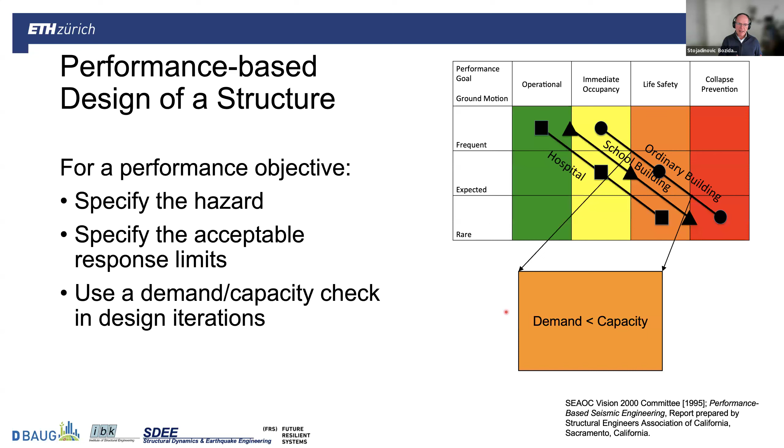The way we do it is that we consider a number of performance objectives associated with risk, with the hazard exposure that the building may have, differentiating of course between buildings. But then for the design situation, we select the design hazard, we select the acceptable response limits that define the performance, and then we use a normal standard design iteration that starts with a trial design, evaluates that design in terms of the attained performance, and then we judge if we're satisfied or not.

If not, we go back and improve the performance of the trial design, and then try again until we actually get a good design that satisfies these desired performance objective or objectives.

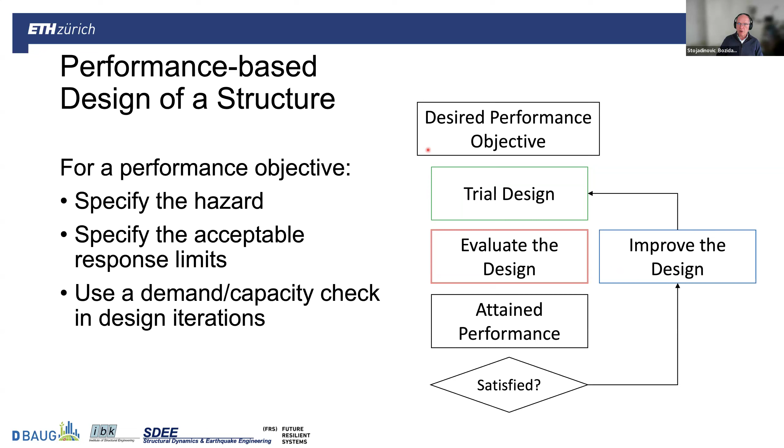This works, and we see that by comparing recent and not-too-distant past earthquakes—here is an example from Mexico City that suffered two similar earthquakes in magnitude and location, in 1985 and 2017—there is a very remarkable difference in the performance of the city and the individual buildings, especially in terms of casualty counts. We see improvements not only immediately because of the newly adopted code, but also as we go forward in time and get better and better buildings.

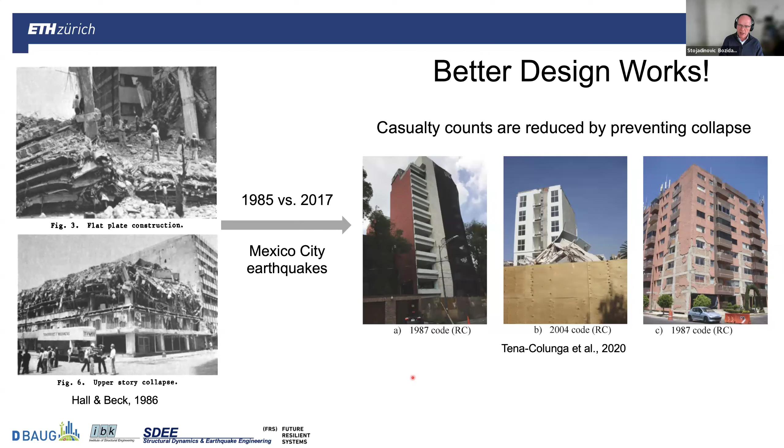This is a good sign that we can address this collapse prevention performance objective.

But as we went forward in research, and especially in practice, we see there is a variety of performance objectives we can look at. Casualty risk is one. Chances of the building being unoccupiable, expected downtime, building cost, the initial one, and the repair cost—you see how they are inverse from each other. We have recently even started looking at the carbon impact of the initial building cost and repairs within the same performance-based framework, meaning the scope of possible performance objectives has increased.

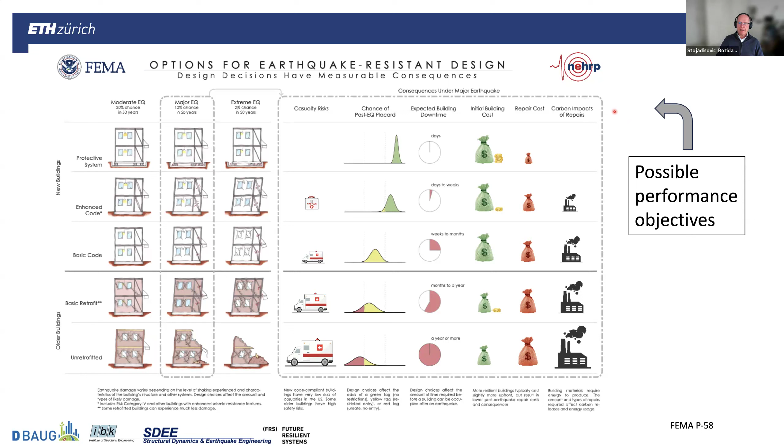Clearly, the scope of possible structural solutions has widened in many ways. This is a statement of the power of the performance-based earthquake engineering framework, this particular one conceptualized at the Pacific Earthquake Engineering Research Center.

But at the time, the MAE and the MCEER Center were also very active, working along the same line: starting with the exposure of the building, looking at information about the facility, then looking at the hazard that structure is exposed to in terms of a probabilistic description, with a variety of different intensities associated with different probabilities of exceedance, and then jumping into a risk evaluation that starts with structural analysis in terms of engineering demand parameters, looks at capacities and resulting damage, and then evaluates losses—either direct ones in terms of the lost building or casualties, and possible repair cost, as well as indirect losses in terms of downtime and inability to use and offer service in that facility.

Overall, the performance-based engineering framework started to consider multiple performance objectives and facilitate decision-making in a probabilistic sense. This is a very important step forward. It took a while—25, 30 years to get here—but it is being adopted in practice.

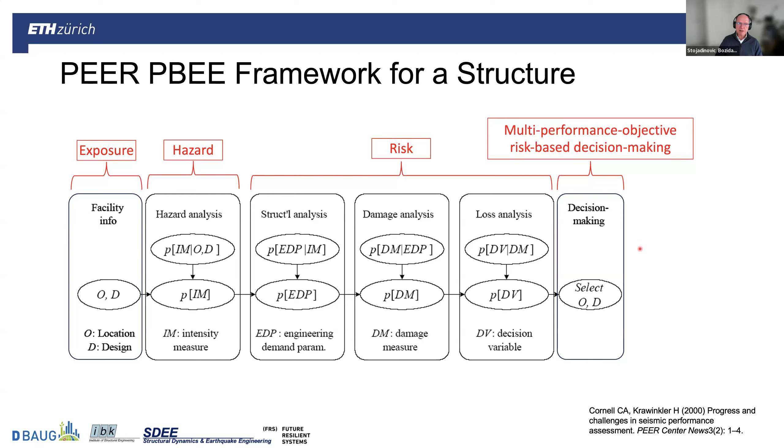And what we have seen in recent earthquakes is this progress toward preventing collapse, but still some buildings fail. To recover after an earthquake, we need to rebuild these kinds of buildings—most likely we need to start from a completely new structure.

However, when we have something less severe in terms of building performance, then we can indulge and undertake repairs. Especially when we consider the carbon loads imposed by rebuilding, a repair may be a very attractive option, not only financially, but perhaps also from many other performance views.

We repair structural elements and systems, of course, but also the non-structural elements that suffer damage. Then, once the building is repaired, we start to restore its function—repairing the equipment, the infrastructure, the service connections—and go on to restoring the functions of that building: turning the lights on, the water on, communications on, air conditioning and heating on, bringing the building back to life and attracting people back to it.

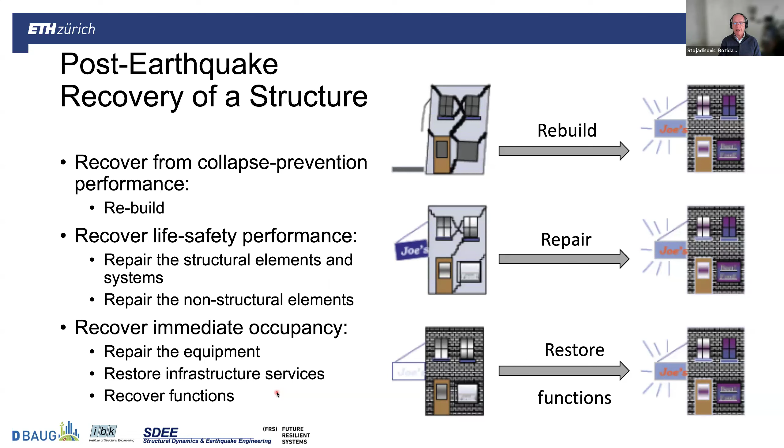However, we have seen in past earthquakes, especially when there is much more repair than tragic loss, that the path to recovery is quite long, depending on the damage state—the longer the bigger the damage state is—because there are quite a few preparatory tasks one has to complete before any repairs can start.

We always start with some rapid inspection in terms of tagging and occupancy immediately after an earthquake, but then we have a detailed inspection, and perhaps some cleanup.

We need to consider what repairs can be done, what needs to be done, and design that, estimate the cost, find the contractors, find the financiers, obtain the permits, mobilize the contractors with their materials and equipment and people who are going to work, and only then start the actual repairs. So there is quite a chain of impeding factors that Mary Comerio identified in the mid-80s.

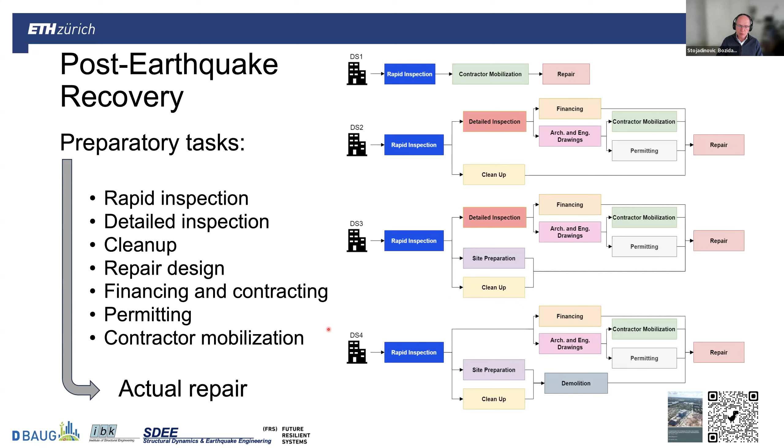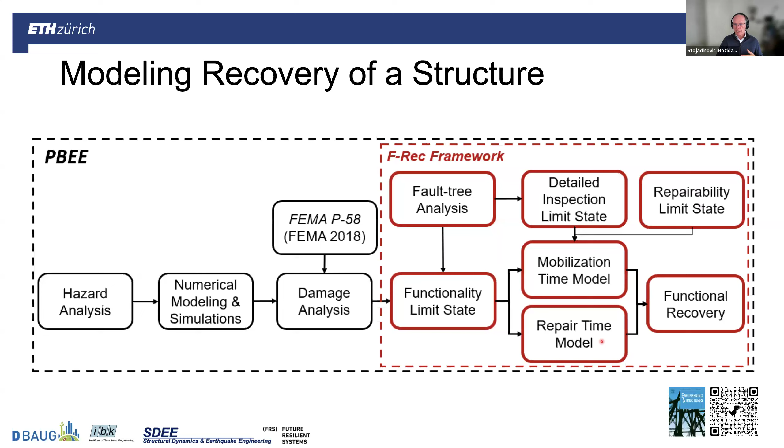This chain is here now, very visible, and we can dissect it into particular elements and see how to work with it. This is a step that is very necessary when we want to model the recovery of structures. We can build on the performance-based engineering framework, perhaps the FEMA P58 incarnation thereof, and add another analysis of the functionality of the building, perhaps using fault trees, to look at the mobilization time needed to overcome the impeding factors, and the repair time needed to restore the building to the level when the lights can be turned on.

And the function of the building restored to its previous, pre-earthquake state. This framework, the one I choose to present here, is the F-Rec framework that Dr. Vesna Terzic developed originally, and then we collaborated on it - I'll talk about this later. This is a framework that models and simulates the repair and function restoration processes of a building, and it is a very detailed one.

It allows one to put together a repair plan in terms of the sequence of repairs of structural and non-structural components. In this example of a 42-story building in Los Angeles, there is a set of Gantt charts addressing particular elements such as shear walls and structural elements, non-structural elements such as elevators, and service level elements such as partition walls, cooling and conditioning, as the progress of this work goes on floor by floor in this tall building.

We can also see what limited resources in terms of material, machinery, and manpower for recovery can do to prolong the recovery timeline. The recovery timeline is already almost a year, and with limited resources or additional impeding factors during the repair process, it may get even longer.

But what is very important for design purposes is that we can quantify and measure this repair process using the well-known resilience curve, the swoosh-shaped curve that starts with a drop of functionality and a time to decide what to do with the building, time for impeding factors, and then the process of recovery that gradually starts and builds up towards restoring the function of this particular structure.

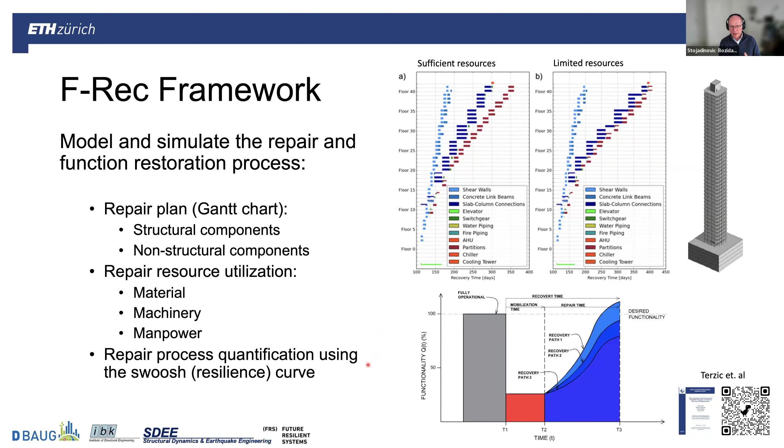Having this framework and the ability to analyze recovery in good detail, we can quantify it using the resilience curve. This gives us an opportunity to extend the performance-based engineering framework by inserting the recovery process simulation between the risk and the loss assessment.

So now the loss assessment includes this time dimension. It includes a very good estimate of the time needed to recover, the cost needed to recover, and the resources needed to do so, either to absorb the impeding factors and take care of them, or to affect the actual repairs. So the scope of decision making is now much broader, and yes, more complicated, but also more realistic.

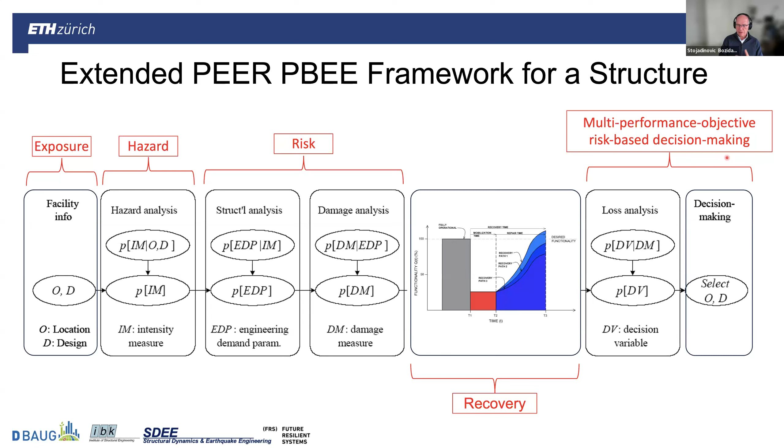This is especially true looking at modern earthquakes happening in modern communities and cities that have advanced in terms of protection against collapse and are now not suffering as much in that sense, but still suffer quite a lot in direct and indirect losses to the buildings in them.

And speaking of cities, let's go to that level now. A city is a complex system, a system of systems, of houses and infrastructures, the technical systems, but also a city is about people - first and foremost, the city is about people and the interaction that these people have with the technical systems that serve them in the city.

This is a socio-technical system of systems. And as such, when we want to look at resilience-based design, we have to look at the elements of the system. The main reason is that the recovery of a single structure, no matter how masterful we are at performance-based design of that structure, does not happen in a vacuum. Here is an example from Christchurch, where the central business district was quite damaged in the 2011-12 series of earthquakes.

But it was cordoned off for a while until the impeding factors and the planning was completed, until the financing was done. And then slowly the cordons were lifted as the buildings became available for repairs and finally repaired or replaced and returned back to function, so that life in this downtown could come back to approach the normal pre-earthquake life. So recovery of the housing and infrastructure induces multiple interdependencies that we have to consider when we move from consideration of a single structure to the consideration of a city.

Here is an example. We can have casualties and injuries right after an earthquake, and they will present a load on the emergency services somewhere in the city. Further, housing damage widespread in the city represents demands on temporary housing and repair resources - temporary housing immediately, repair resources slightly after the impeding factors are overcome.

But on the other hand, lack of housing, or people moving out, reduces the demand for infrastructure systems. So those systems have some time to recover and repair and restart their services, because the demand for their services is not that high. In the meantime, as the recovery gains pace, there may be competition for recovery resources, introducing a further level of interdependency.

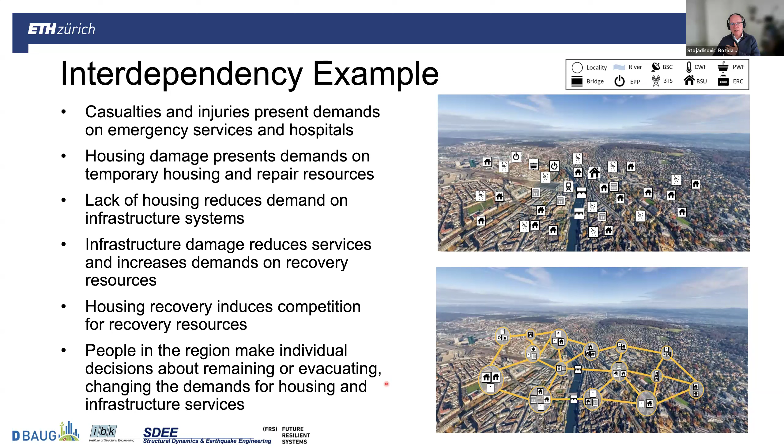And finally, and most importantly, the people in this stricken region, the city, make decisions about what they're going to do. Are they going to evacuate or remain? And those decisions clearly affect what the housing is doing, and how that housing affects the other systems that are in the city. So looking at the recovery of the city cannot work without considering these interdependencies.

Recovery is a regional problem. The single structure depends on other structures. So the hazard and risk exposure, hazard assessment and risk exposure, become regional. The infrastructure systems get immediately involved. The recovery of the technical systems plays a role in the recovery of the city very, very clearly.

And there are very, very important interactions between the individual actions and the collective actions of the citizens, and not only in how they solve their own individual problems, but how they restore the workings of the city at several societal levels that are higher up above the personal safety and well-being of a person.

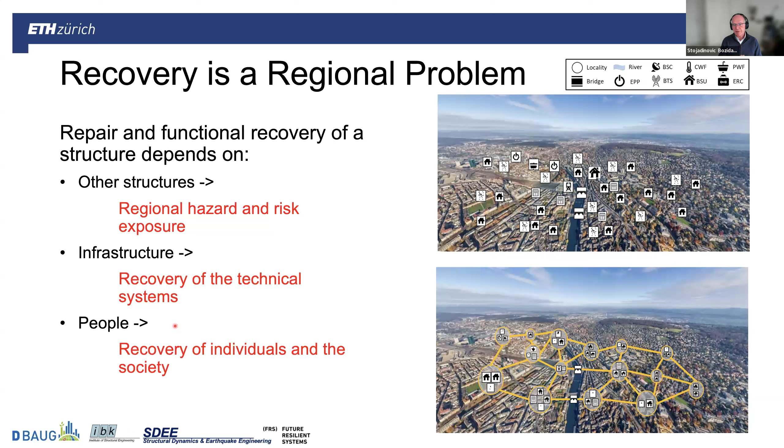So to formulate resilience-based design of a city, we have to include a notion of technology-neutral design, building on performance-based design principles, and also address several performance objectives simultaneously - but those are now related to the risk and recovery of the city, not of a single building.

Considering that city as a socio-technical system of systems with all of the interdependencies involved, therefore the resilience-based design problem is more complex.

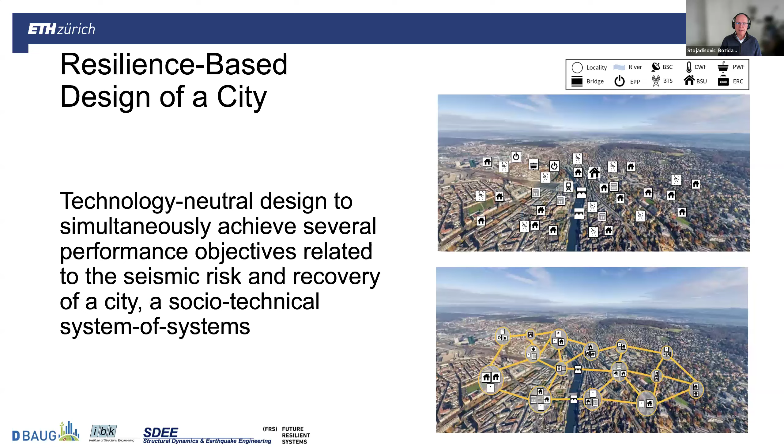To solve this complexity, we need a really good model. And what we have been developing in ETH for a while now are models that look at the city as a system of systems, and employ flow models to represent the flow of resources within one infrastructure system and between infrastructure systems.

The components in these systems, including housing, can be damaged, and as they are, they disrupt the function of these systems. But they are repaired in some repair sequence, and they restore their functions gradually through the recovery process. This induces an evolution of the infrastructure system level demand and supply and the ability of that system to function and satisfy the needs that may exist in the city, in the system of systems, at any point in time during the recovery process.

By this supply and demand interchange for every one of these elements, and because we have a system operation model, we can look at how the interaction between the different systems affects each other, and how the interdependencies occur during the recovery process, and what are the consequences of those interdependencies.

It is important that interdependencies are captured. The model I talk about is this iRe-CoDeS framework.

This is the model we have at ETH that simulates the infrastructure system of systems recovery process. It enables us to look at the operation, supply, and demand time history, capturing interdependencies on the operation side, but also the recovery resources, the material, machinery, and manpower involved in the recovery process. Also the manpower, finance, and decision-making effort, permitting effort required to overcome the impeding factors to the start of the actual repairs.

This dual operation and recovery view of the supply and demand is another important step in the iRe-CoDeS framework. It enables us to look at and quantify the recovery process using these swoosh-shaped resilience curves, starting with the drop of service and recovery of it, and due to the presence of interdependencies, identify regions where the connections between the water, power, and communication system induce additional drop in functionality and inability to satisfy the demand. There is a larger unmet demand.

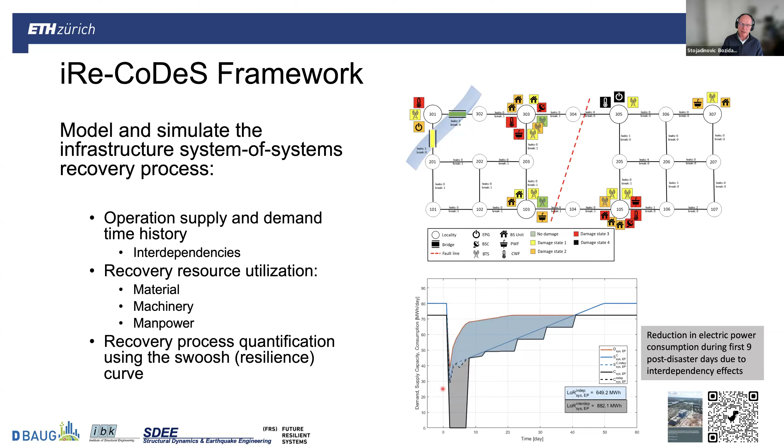So what we did next, and that's where we started to collaborate with Dr. Vesna Terzic, the ETH side with iRe-CoDeS, her side with F-Rec, is to see how this whole thing can come together in a performance-based analysis of a city. There we recognize we have multiple buildings and multiple infrastructure systems. The buildings are represented in F-Rec as individual analyses, hence this exponent n, and the infrastructure system is already represented in iRe-CoDeS. So the system analysis framework starts with the hazard analysis, just like the PBE framework, the structural analysis to figure out the damage, but now that's done for multiple buildings at the same time.

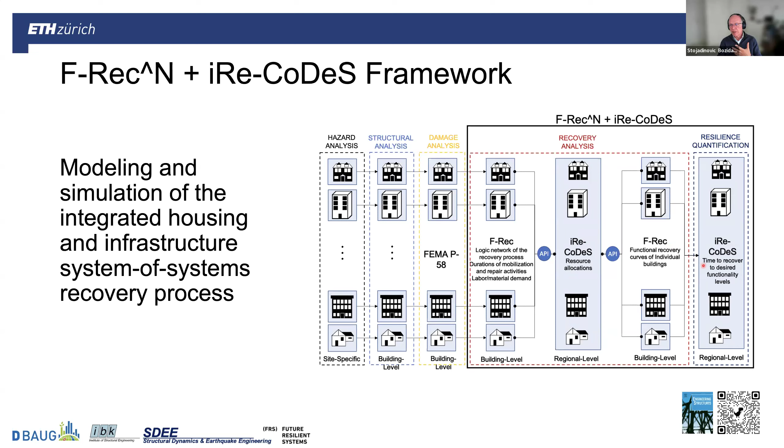Then multiple buildings are assessed for their recovery trajectories using F-Rec. This is then integrated in iRe-CoDeS, both in terms of the recovery resources and the functional recovery of the infrastructure systems. So both the buildings and the systems are treated in parallel at every time step of the iRe-CoDeS recovery analysis, and that, in the end, produces a city-level estimate of what it will take for it to recover.

Here is an example from the downtown San Francisco fictitious earthquake affecting several thousand buildings in a number of blocks that form the downtown San Francisco business district and a little bit towards the marina. Using some typical buildings, tall ones, medium-rise ones, and short ones, we simulated the recovery, and one can see how stepwise recovery, story by story, takes place in terms of building function, with short buildings recovering faster than the very tall ones.

But there are other things we can see, because we consider recovery resources also as the demand for workers. The supply for workers is this line here, where the demand is this jagged line indicating the variability of the demand for workers once buildings get ready for the actual repair, once they overcome the impeding factors. These blue areas are areas where the current supply of workers is insufficient to meet the demand, causing further delays in the recovery process, for example this jump here.

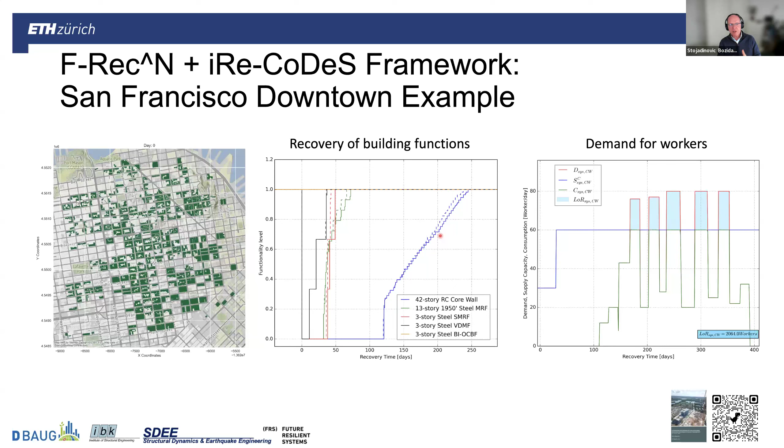This is a very valuable analysis, showing that the combination of F-Rec and iRe-CoDeS can be a very nice regional recovery analysis tool, helping make decisions in real time, and helping make projections for what future earthquakes may do.

One additional, very important aspect is the view of what people do and how people reconstitute their lives and how they reconstitute the societal functions of a city. Individual citizens make choices, whether they will reoccupy the house where they used to live or not, where they will live, when they will restart using the infrastructure systems, how this demand will be reflected on the systems, and how they will come back to life in this city.

If they're nurses, they can come back to work in hospitals. If they're teachers, they can come back to work in schools. If they are hairdressers, they can come back and service their customers. If they are workers in factories, government, or financial services, they can restart everything that constitutes the economic activity of a city. The model we use to do this is based on the capabilities approach by Sen and Nussbaum. This approach looks at commodities.

That is, what are the resources that enable a person to fulfill their capabilities. And the capabilities are what that person may want to do. The conversion factors are simply the existence of a house, operation of an infrastructure system at a very basic level, and then further operation of the hospital, school, businesses, and so on.

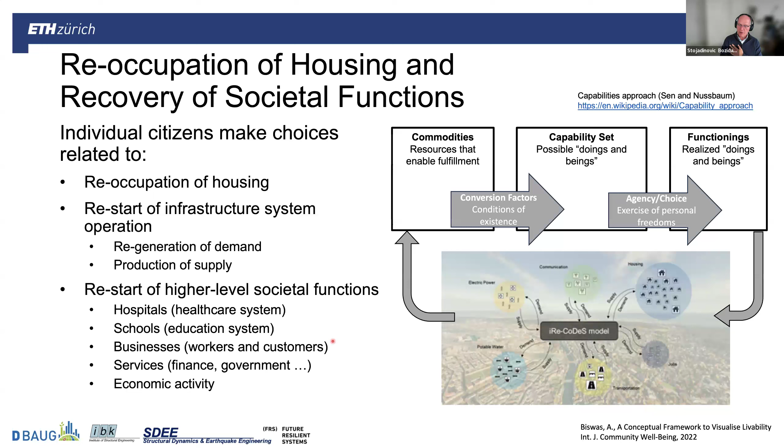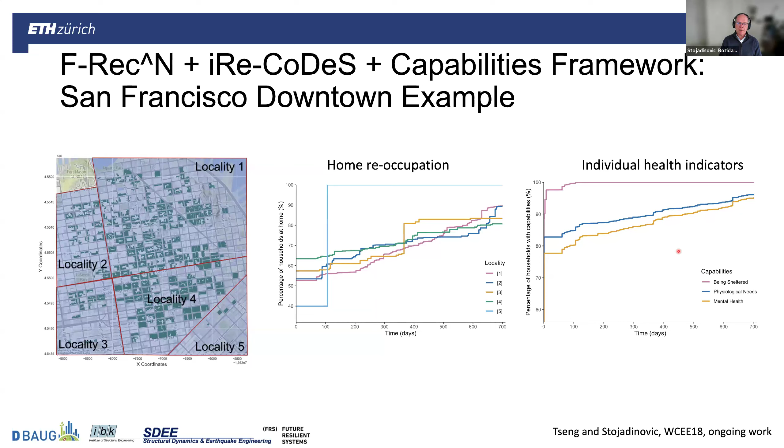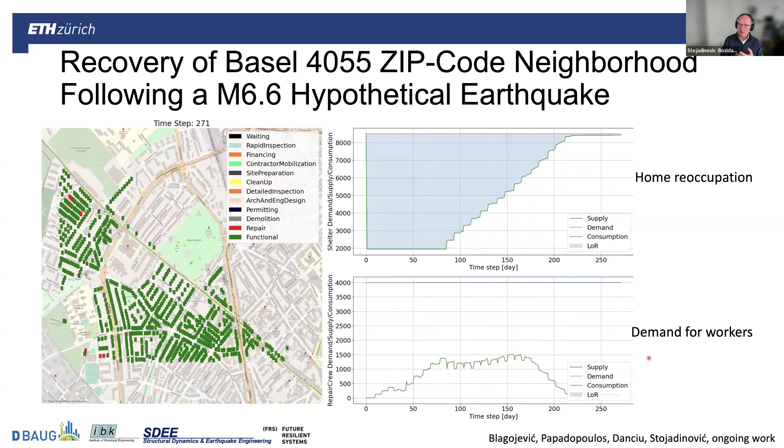But in a particular setting of the city, it is quite important to estimate what that demand may be, so as to contract people from outside areas that may not be affected by an earthquake but are able to work on the recovery of the buildings here.

This simulation and the other ones that I presented are made possible by software, of course. The software we're using is now Pythonized ReCoDeS, PyReCoDeS. It is open source, and here is a QR code for the link to that open source repository. It is designed to model the recovery of a city and to quantify its resilience.

The structure is object-oriented, of course, and we think it has a fairly clear structure where users can adopt, input their own vulnerabilities and recovery functions, look at their own models of infrastructure systems or adopt some open source models that we use, and compute the time evolution of certain parameters that are important for the performance aspects they would like to investigate, both on the operational side and on the recovery resource side of a city.

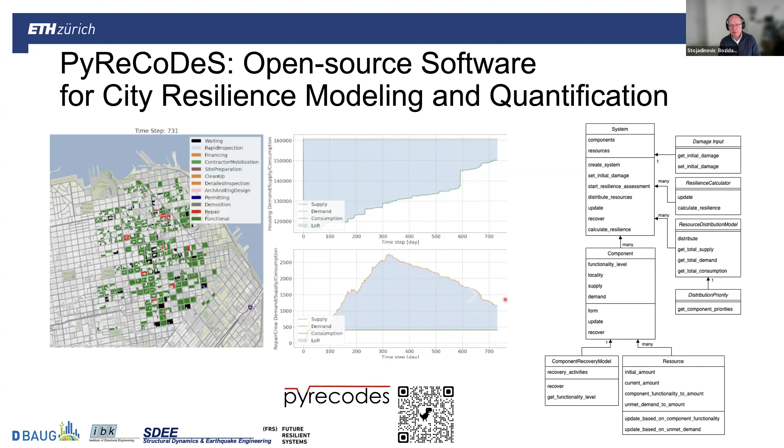With this software, we hope that this or some similar existing software can facilitate adoption of resilience-based design. But one other aspect of resilience-based design I need to address is the resilience metrics. Here is the one we have been using, which compares the system supply, the system demand, and computes the actual realized consumption of a particular resource, say electric power.

This blue area here is the actual unmet demand, and integrated over time, we get a measure of the lack of resilience, a measure similar to what many authors have proposed in terms of the area under, or above, the swoosh resilience curve.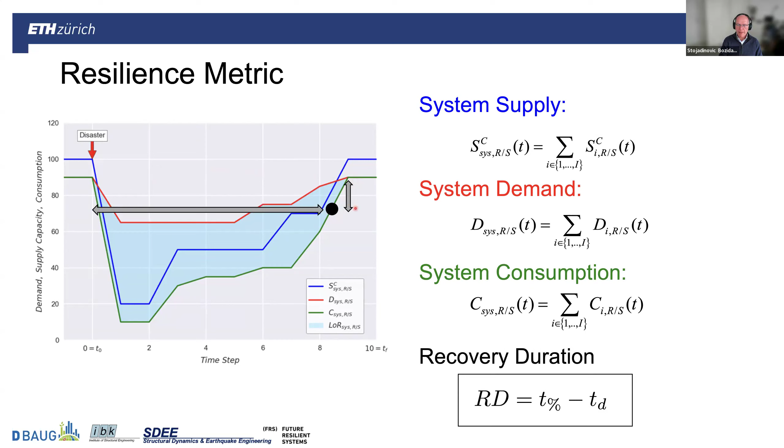But we also look at another simpler measure: time to recovery of a certain service level. This is the duration it takes to come back to a percentage of the previously available consumption. It's a simpler measure, also supported by the NIST 1190 document.

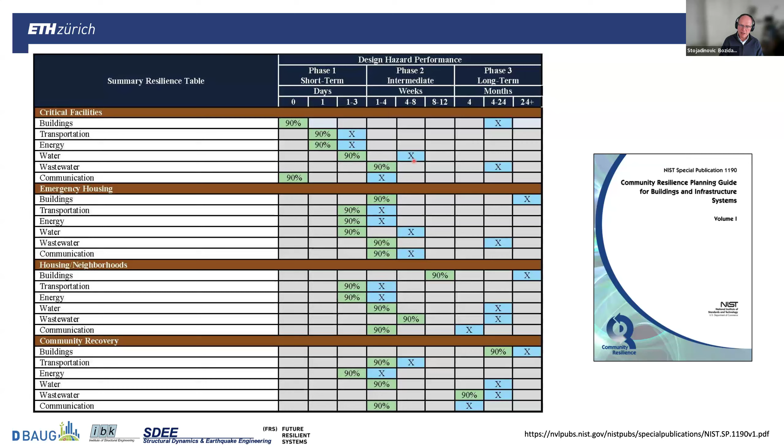Times to recovery in terms of short, intermediate, and long for many systems and facilities of a city have been proposed, with percentages indicating where this is desired, the green boxes, versus where it's estimated to be now, the blue ones, showing we have work to do to improve resilience. But this format of time to recover is quite useful.

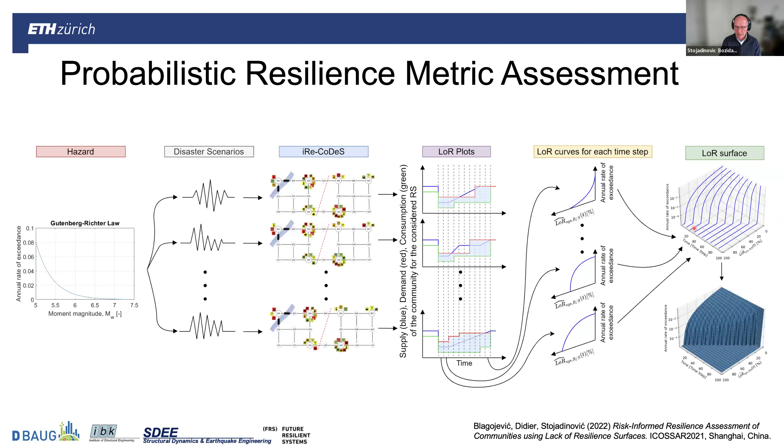We can go further with iRe-CoDeS and do a probabilistic analysis of this resilience metric and others, starting with the probabilistic hazard assessment, a number of iRe-CoDeS runs for different disaster scenarios, aggregation of those runs, and production of lack of resilience surfaces, or time to recovery surfaces.

If we set a goal of having, say, less than 20% of unmet housing demand 10 days after an earthquake, we can look at the state of the community's housing at the 10th day, and ask ourselves: is this annual rate of exceedance acceptable or not for this particular community?

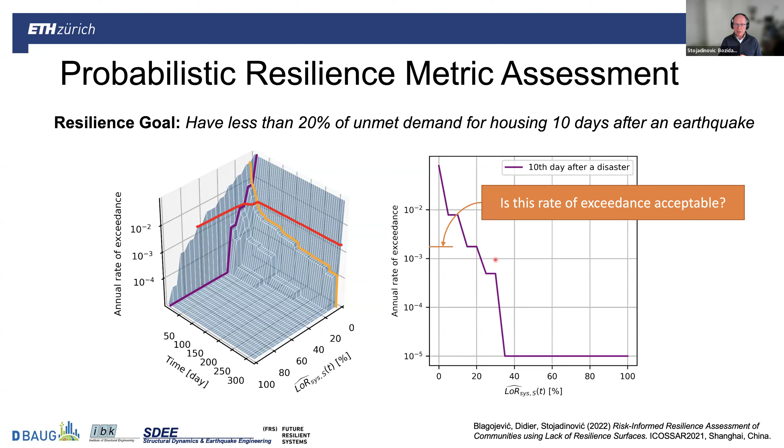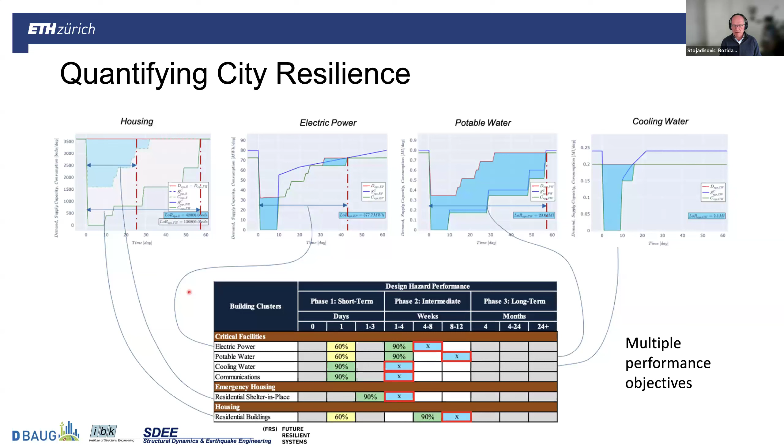That way we can start formulating probabilistic performance goals related to resilience of a city, of a system of systems, considering housing, electrical power, water, cooling water, different aspects and services, similar to what the NIST 1190 document prescribes. So multiple performance objectives formulated considering the risks and resilience of a city.

The framework that could be termed the resilience-based design framework starts with the performance-based framework, but does so multiple times to cover the housing instances and infrastructure system components in the city, then brings them all together in the recovery module.

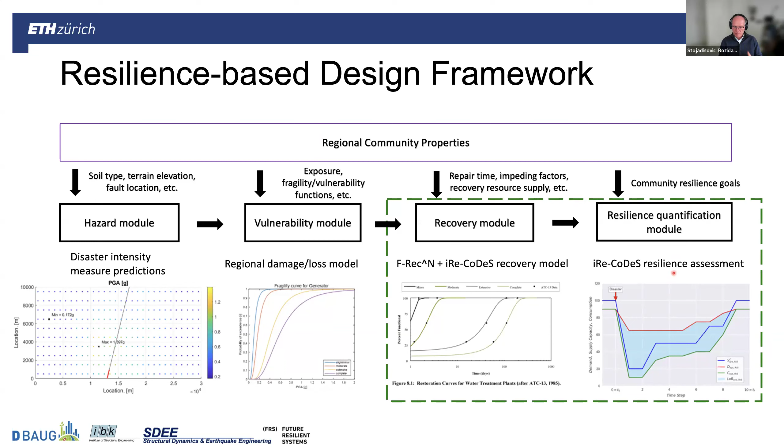Resilience is quantified and computed in various ways, but most likely in terms of this time to resumption of service. So we can think about the resilience-based framework of a city in a way that's similar to the performance-based framework for a structure.

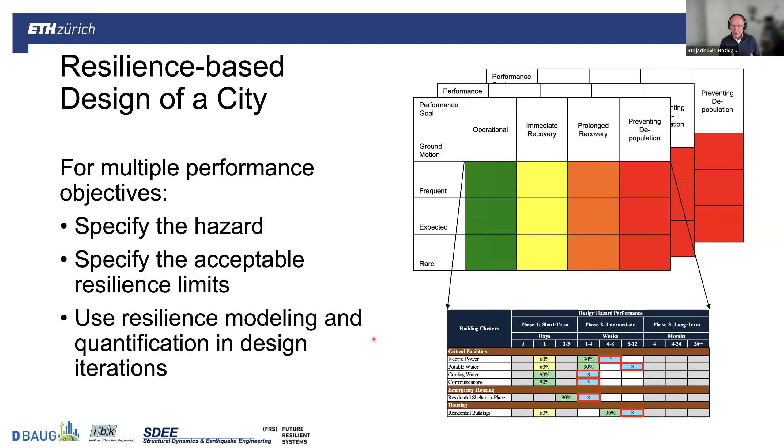One of these panels with performance objectives, hazard, and functionality level needs to be repeated many times and integrated using a framework such as iRe-CoDeS, to produce performance measures or resilience measures that we can look at in the NIST 1190 framework, for example, and evaluate if such a city is resilient enough.

We would start with the design resilience objectives, look at the current state or some future state of a city, thinking about urban development in the future. Use a model to evaluate this design for resilience performance, and check if we're satisfied. We can also deploy measures to improve the performance of the city and test them.

I won't talk about them now, but they're definitely possible to imagine: making buildings less vulnerable through retrofits, or providing more resources to increase the rapidity of the recovery process.

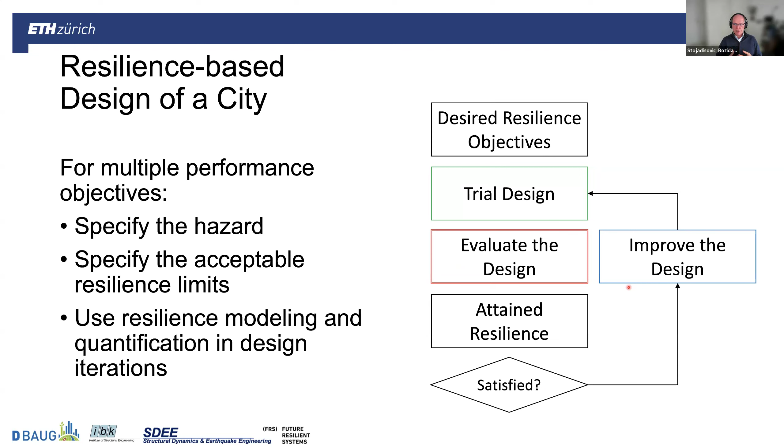In this sense, I hope I have shown you that it is possible to think about resilience-based design, and that it's possible to conceptualize it based on what we know from performance-based design.

Challenges remain. Cities are complex socio-technical systems. The resilience tools are now focused on technical aspects more than societal aspects. We need to work on that. We need to provide better cost-benefit analysis, benchmarks, and tools such that resilience-based design can be more effective and more actionable.

And then there is a bigger challenge: a city is a dynamic system. Over time, it changes.

The environment changes, the hazard changes, climate changes. If you look at flood hazards, they will be bigger. The buildings age, get torn down and rebuilt for no reason related to any hazard, but just because of the urban development of that city. Technology changes. We are just about to start massively adopting electric cars. How will that change the resilience aspect of the city? And so society changes itself. People age, young people come of age, their values are different, they care about different aspects of resilience, different aspects of function of the city, and therefore its resilience.

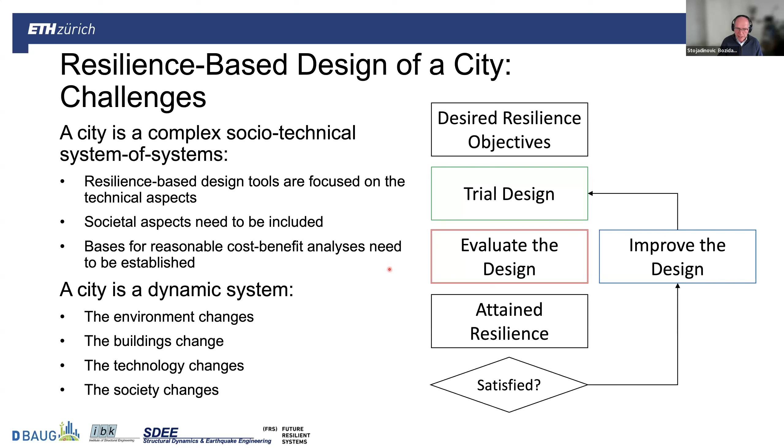With that, let me acknowledge the contributions of my students and colleagues at ETH, Nicola, Max, Lee, and Vesna, and the students working at our Future Resilient Systems program in Singapore, in the NUS and Create Building, Lawrence and Hamed. So here is where I stop. I thank you, the audience, for listening to me, and let us go on to questions.